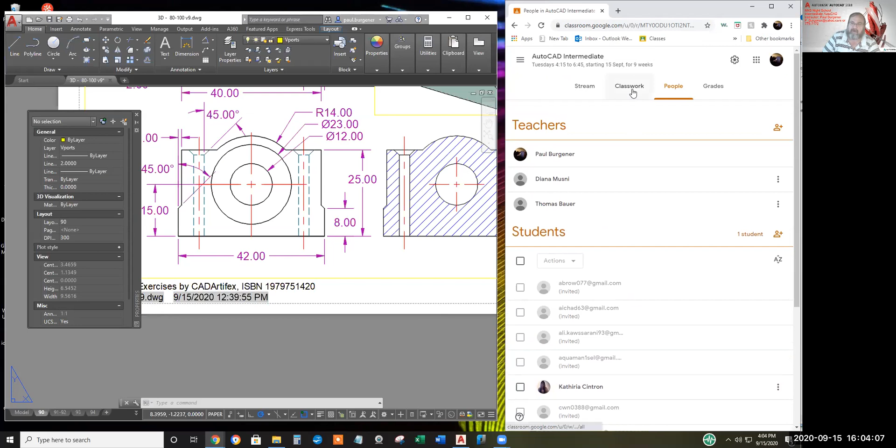I can't remember, you might be the one and only person that's moved into the classroom, so to speak. Yeah, I sent invites to about 13 different Gmail addresses I've got, and you're the only one that clicked a few times or whatever it took to join the classroom.

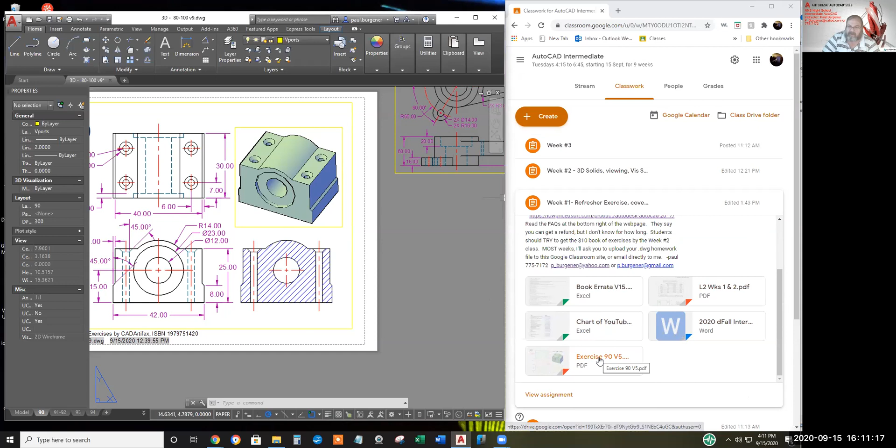While we're waiting, some of these files that I uploaded to week number 1 in Google Classroom, for some reason they won't open up in a browser. I got to figure out how to download them, but hopefully by now y'all have this errata sheet. There's been very, very little change since introductory, so it'll very rarely get updated. I'm trying to put a little asterisk every time I reference an exercise in handouts, as a reminder to go to the errata sheet to find a clarification or a typo correction.

Another file I should send y'all, this is, I sent you 2 weeks worth of the handouts. On the right side of my screen is our mission today, to see how much we've forgotten since introductory. I often refer to this assignment as a placement exam, like as if you need to pass this exam to start the class.

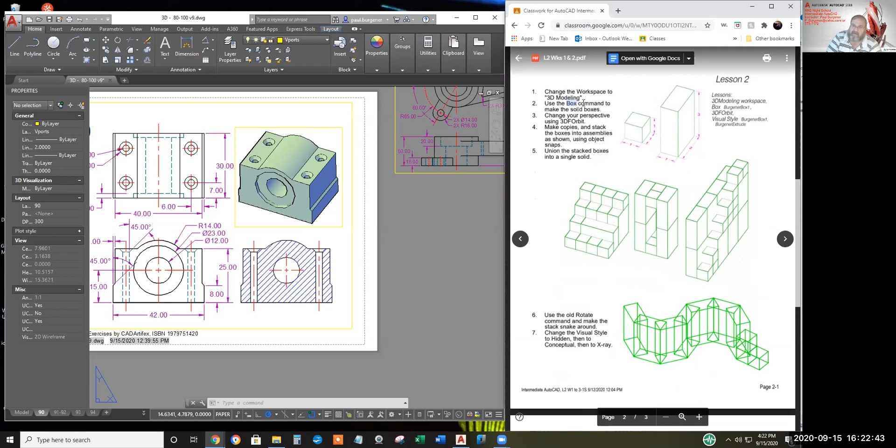Getting back to the handouts, again, next week we'll stack up these shoe boxes. We'll extrude rectangles or use the box command. The box is pretty limited. You just type box, enter, and type length, width, and height, and you end up with a solid box.

But pretty quick we get into the extrude command, where any closed polyline, or I believe a region, which I really don't teach at all, but generally speaking, a closed polyline you can extrude into a shape. And next week we'll get into triangles, pentagons, and hexagons, just because they're simple objects made with the polygon command. And stack them up. We'll also learn some visual styles.

Years ago, AutoCAD referred to visual styles as... nuts. I had it an hour ago and lost it now. We had a different name for visual style. I'm going to lose sleep on that now. So that might be a short week next week. Maybe we can get ahead between making boxes and stacking them, and making polygons and stacking them up, exercising a few of these visual styles.

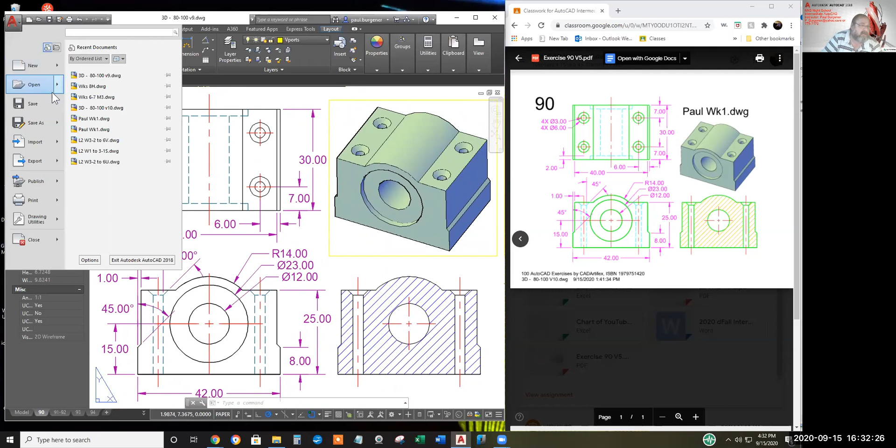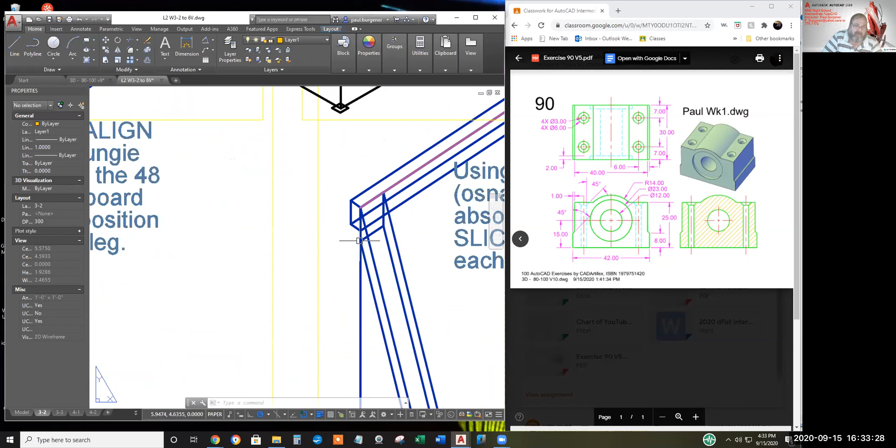Let me open up some more files of what we're getting into. Yeah, I think after next week of stacking blocks together, we'll get into, okay, that's week number 5. Let me revert to page 3. Not sure what page 3-1 was, but week number 3 we'll start working with these little lumber pieces. And an exercise I like to use is building a sawhorse. We'll learn how to use the slice command to slice a wedge off the leg of a sawhorse here, without having to know what angle to put on your miter saw. We can just use a 3-point slice command and lop off that plane right there. Eventually we'll generate this design of a sawhorse.

All right, I just heard a chime. Let me see if I can. Uh-oh. Hello, come on, come on. Damien is entering. Okay, they're letting Damien in.

Also in the third week, I give you a little, how to put this, a little busy work exercise of things to make using the same tools we made the sawhorse out of. And I think you'll find that my handouts for this intermediate class cover a lot more exercises than we really have time to do. So I give you an extra page here and there to continue practicing between classes, if you like. And I'm tempted to say everything on here can be done just with the extrude command, align and slice. Can't remember. Maybe this mailbox might be a little tricky.

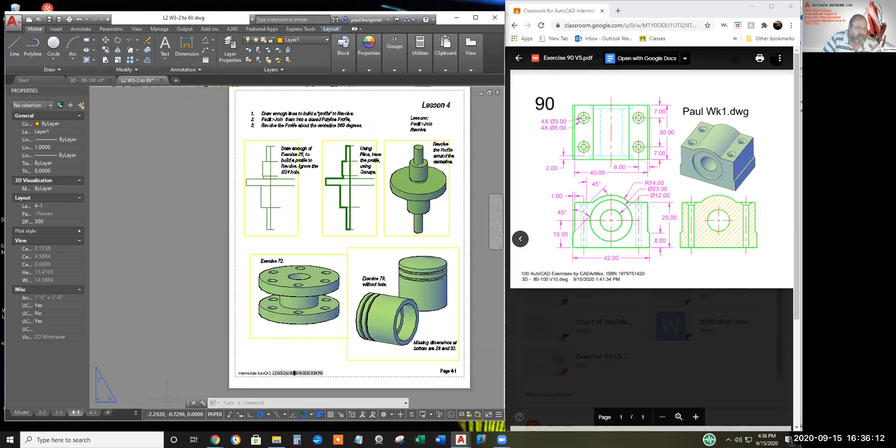This is a little busy work. We'll learn the revolve command to make this table leg. And eventually, leveraging what we learned in working the sawhorse, we'll use the intersect command to make these legs and make a little end table. Week 5, we get into some 2D topics.

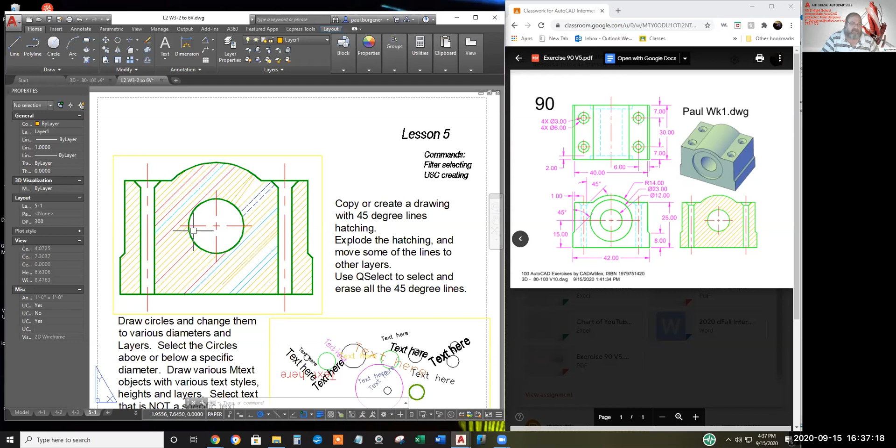Forgive me if I covered this the last day of introductory. But one intermediate topic, I think, even though it's not a 3D topic, is how do you select objects based on the layer they've got, the color they've got, in this case the angle of the diagonal. Your mission is to delete all these 45-degree lines. And you see there's very, very few that are not at 45.

Anyway, with filtering, we can, I'm getting deja vu. I did cover this in the end of introductory, but with AutoCAD's filtering, you can say, hey, AutoCAD, select all lines that are at an angle of 45 degrees. And similarly, you can say, hey, AutoCAD, select all pieces of text whose rotation is not 0. And you can straighten them all out

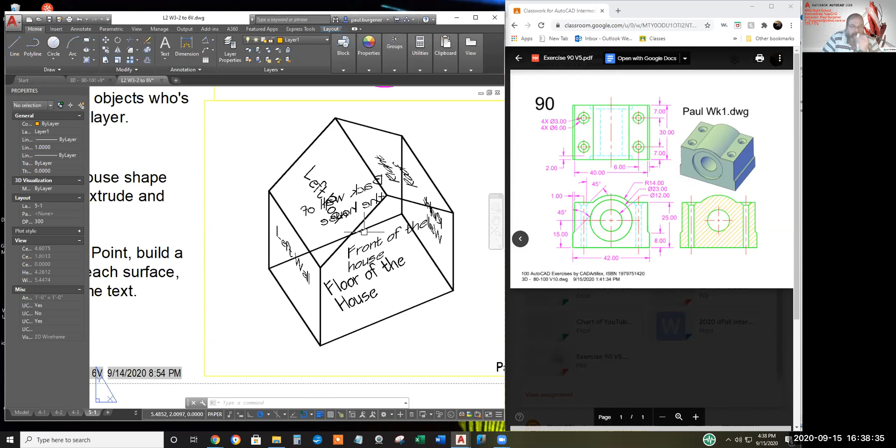with this database query. We'll also get into putting an XYZ coordinate on different sides of this little house shape object. You can only go so far with X and Y being on the floor of your solid model and Z being straight up. Sooner or later, you need to put X and Y on the side and bottom edge of a sloped surface. And so we'll play with XYZ changes.

Finally, in week 5, we get to viewports and layouts. I used to teach this the last day of introductory, but we shortened how many weeks we can teach now, so I bumped it into the intermediate. Kind of surprised I bumped it all the way to week 5.

Let me toggle over here to the model tab. Each of the viewports can show a different view of your 3D solid object. So you can have one camera looking at a southeast isometric here and one looking in front view. You know, it's kind of like having different cameras set up.

Let me admit somebody with an iPhone who is joining us.

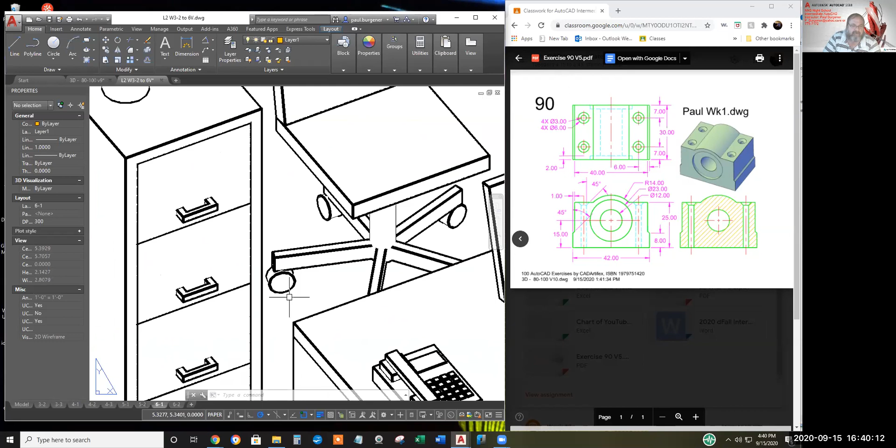Let's see, in week 6, we'll get into making blocks. I can't remember if we got into blocks with 2-dimensional work. But there's very little change in making a rubber stamp out of a 3D object. So you can weld all the parts of this office chair together, so it's one welded assembly.

That is cool. He is good. Like that, huh?

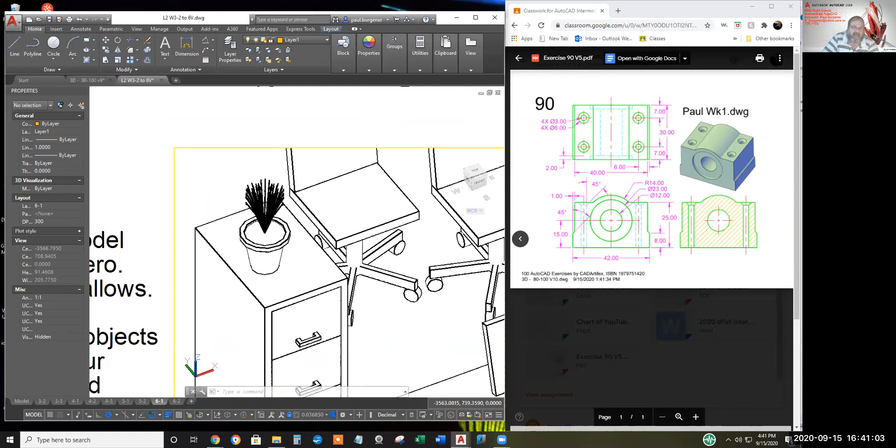That's cool. Okay. Eventually, I'm hoping I can assign one student to make an office chair, another to make an office file cabinet, another to make an office plant, and just for the sake of time, make it extremely crude to begin with. Then we'll share each other's blocks with the entire class, and as time permits, you can add arms and wheels and more complexity to the block that you own.

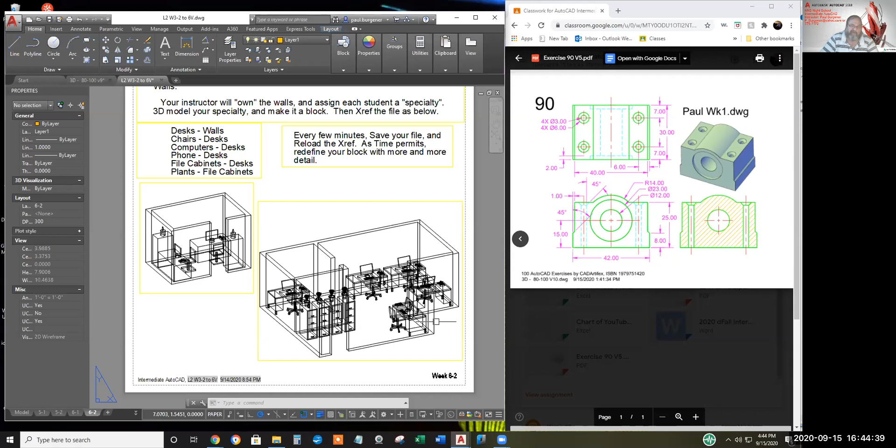And it gets into some high-tech intelligent drawings with attributes assigned to many of the objects. And I believe architects will be able to generate a bill of materials. The computer can count how many repetitions of the desks are in the drawing and generate a table saying, hey, you've got to order 10 of these Acme model seats and 30 of these for the conference room and 20 of these for the break room. Same with the windows and doors and all the material that goes into your architectural drawing.

Let me open up the final project. And let me go up here to the final project, which I think will take you a good 2 weeks to work on. It will be a birdhouse.

Why am I having trouble? Someplace I got a file of birdhouses that students have made in the past. And why am I not finding it? Well, let me go back to the 2019 intermediate class, and that might be where the birdhouses are. Okay, this is my bird. This is an old handout I had. Why did it not open up? There we go.

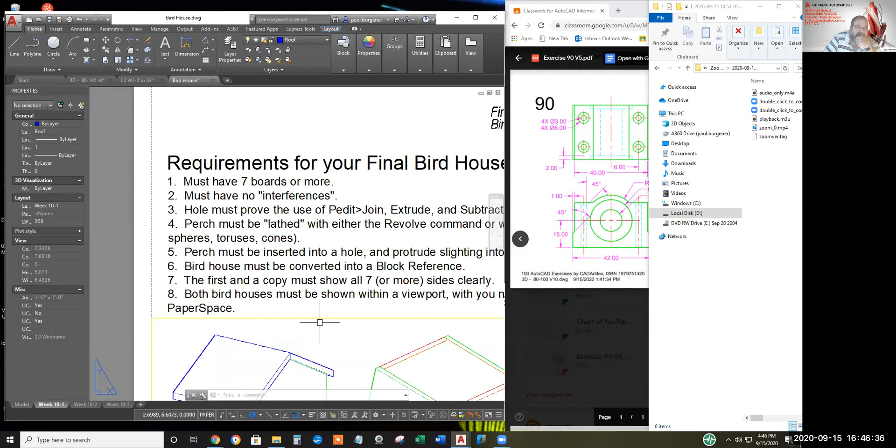I'll give you a list. I forget how old this file is, but I'll give you a list of 8 or 10 or 12 different requirements for your contract. And one of them is I want you to build some odd shape, a clover leaf or a snowman or this little Twitter bird or something, and use it to subtract away from the front board of the birdhouse, showing that you can remember how to join all these lines and arcs into a polyline and extrude them into a shape, and then overlay the extruded shape on this board and then subtract from the board the extruded shape, leaving the void in.

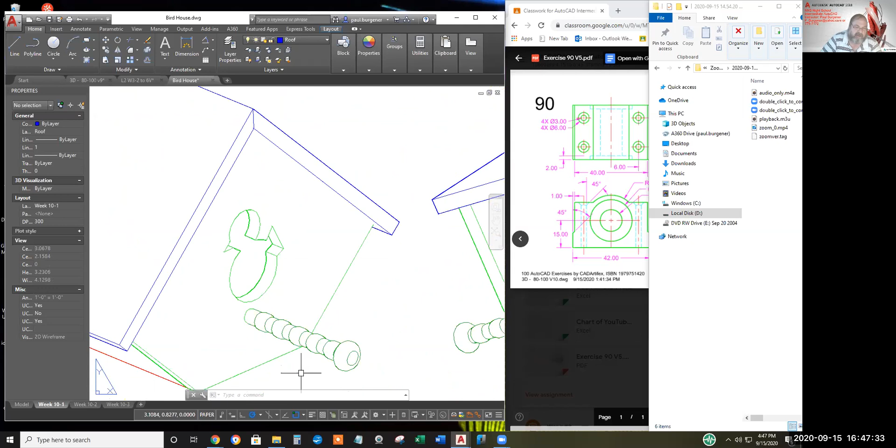We'll also learn the revolve command on how to spin like a baseball bat or something on a wooden lathe. I want you to make a perch using the revolve command with possibility of an exception or using primitives for it. You can stack a bunch of spheres up. It's probably about the same amount of work. Let's see.

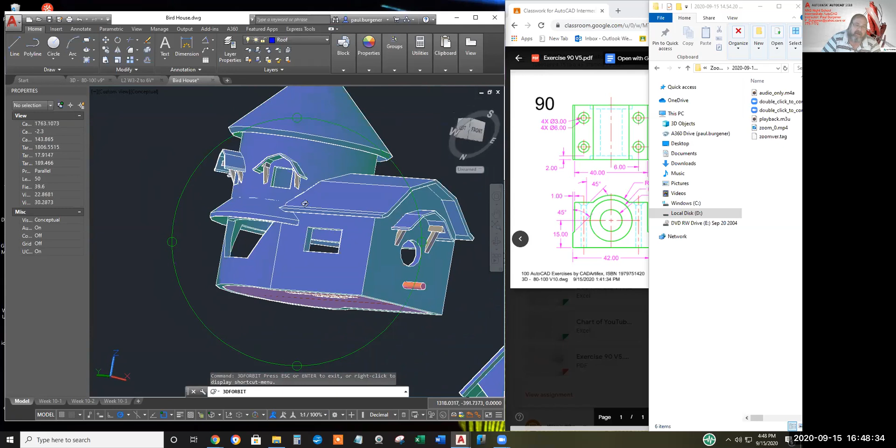Yeah, many years ago, a couple students kind of got carried away and did these birdhouses. And I think on the backs of them, I should still have the student name. 3DFO, enter. View locked viewport, here we go. 3DFO, enter. Yep, there's the student name. Back in 2012, James McLaughlin made this one. And I have no idea how many hours it took him to model this birdhouse. Again, this is above and beyond the call of duty. I think you can do everything that James McLaughlin did with what we cover in class.

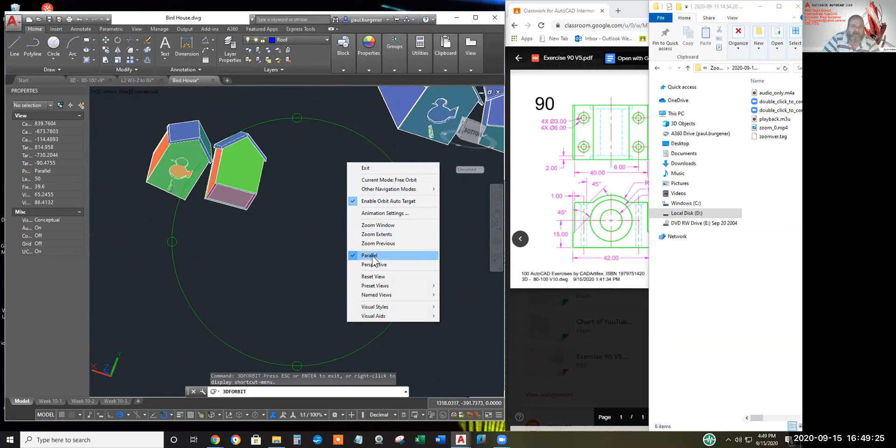Here's a bunch of birdhouses, most of them I made. Some of them are just made just for the challenge of them. Yeah, I'm kind of proud of this pentagon-shaped one here. You look straight down on this birdhouse, it's a pentagon, but the roof is sloped. So it would be quite a woodworking challenge to set your table saw to make this pentagon birdhouse.

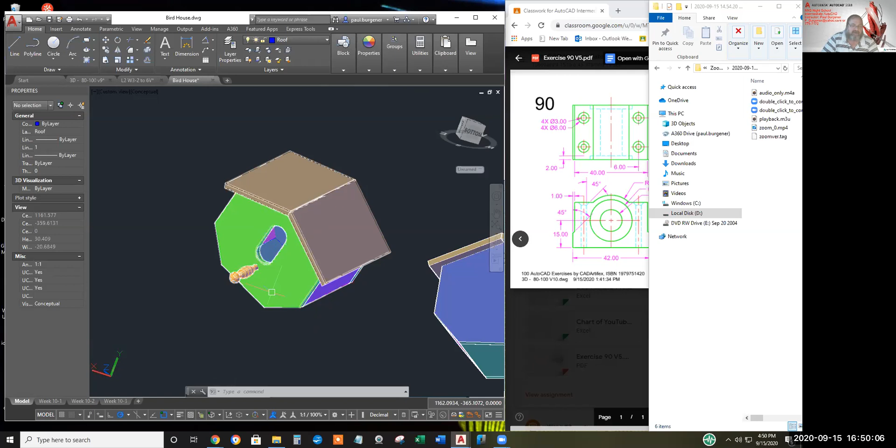Also, I don't believe these have the attributes on them, but I'd like you to attach 2 or 3 attributes, saying the model number, the date of manufacture, I forget what else. It'll be on the list of the requirements. So you weld everything into a block and assign it these 2 or 3 or 4 different attributes. So that if you copy them 100 times, Microsoft Excel can generate a spreadsheet of how many Model 7 birdhouses there are, and how many Model 7s have been doubled in scale, and how many are on the 3rd deck of the ship, and all sorts of stuff.

Anyway, again, today's mission is just to remind ourselves how smart we are, or how much we've retained from introductory. I got about 10 minutes to 5. Want to take a break this early, and eventually I'll walk you through this exercise and jog your memory if you've forgotten anything. Take a break until 5 o'clock. Hearing no objection, I got 4:51 on the computer. Let's reconvene at 5 o'clock then, and I'll go through the

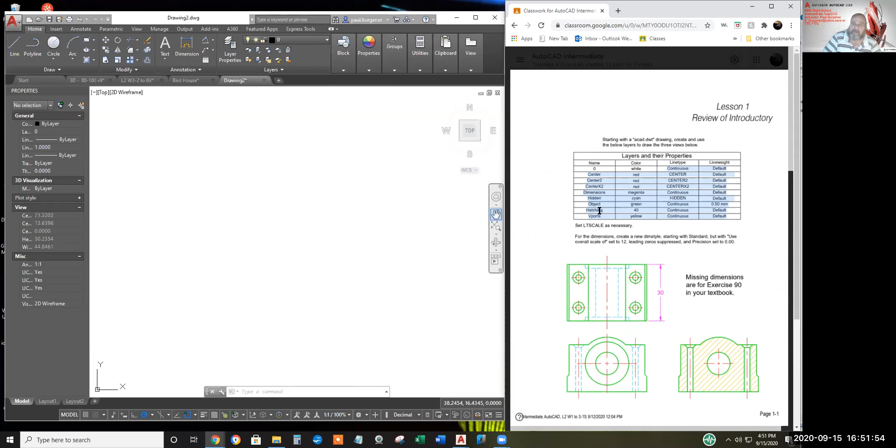Step 1 of today's assignment is to make the list of layers. Some of you may have forgotten. I'll have to admit these are not in alphabetical order. I saw that a little late. And I'll walk you through toggling from one layer to the next to draw the green, the blue, the red, and remember the mirror command.

Once you made one, wish I could zoom in on this. I don't know why it won't let me. Anyway, once you make one double circle with red sniper scopes, just simply mirror it to the next one, and then mirror the 2 into the other side. And once you make the hidden view of the holes with the countersink, don't redraw it over here, mirror it over there. Okay, see you in 10 minutes then.

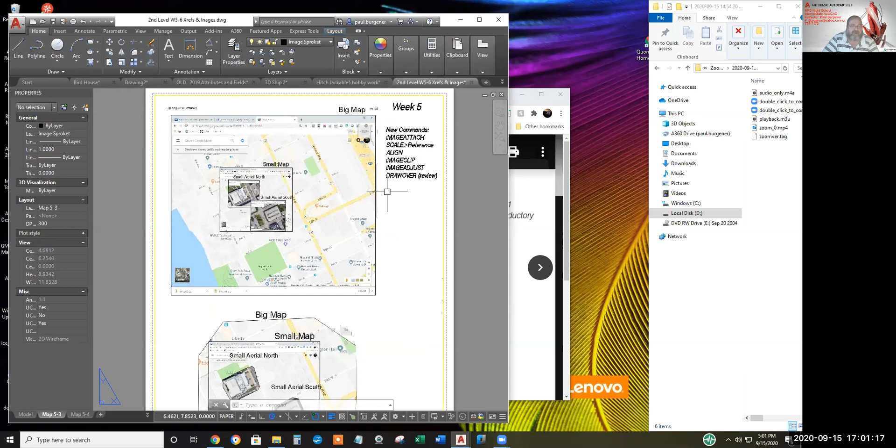If time permits, I'd like to get into these images out of maps.google or MapQuest. You know, one of the mapping websites, you can screen capture a map, and hopefully you got a bar scale in the corner down here. This one says 200 feet. So with the scale command, you can scale this so that this line is exactly 200 feet long.

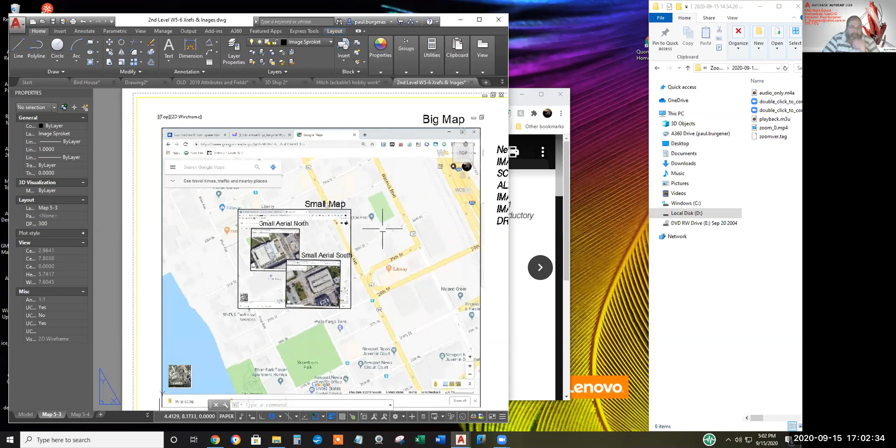And with other screen captures of closer and closer areas, you can align them. I think this is the parking lot that we used to park at when we had classes at the apprentice school. So I aligned this aerial image on the background so that the roads are contiguous. And with this technology, you can plot your 2-mile jogging path, or trace the area that you want to build the new parking lot. And AutoCAD will tell you how many square feet that area is.

And there's also some, I don't have a file open, but with a scanned gasket or a bell crank or piece of sheet metal, you know, it's kind of imaginary if you're out in the oil field and one of the rigs breaks down, take a photograph of the broken part, bring in the photograph into AutoCAD, you can scale it and reverse engineer it and develop a blueprint for the machinist to manufacture a new part with this AutoCAD imagery stuff.

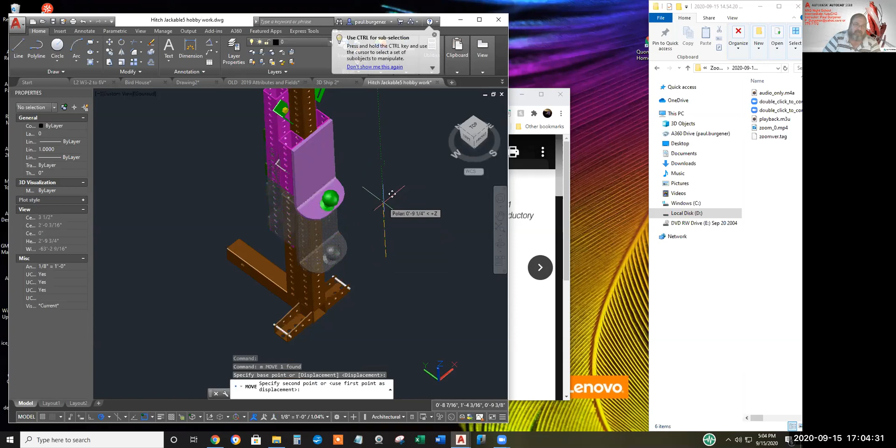But with this trailer hitch and an old bumper jack from a 70s car, you can raise this little elevator up and down the trailer hitch to adjust the ball to a wide range of heights. Not only can you keep your trailer level by adjusting this hitch ball up and down the elevator, but you can tilt your trailer to almost make it a dump truck, possibly even tilt a car carrying trailer so you can winch the car straight up the ramp and onto the trailer. One of these days I'll find all the pieces and get back to building this, see if it really holds together.

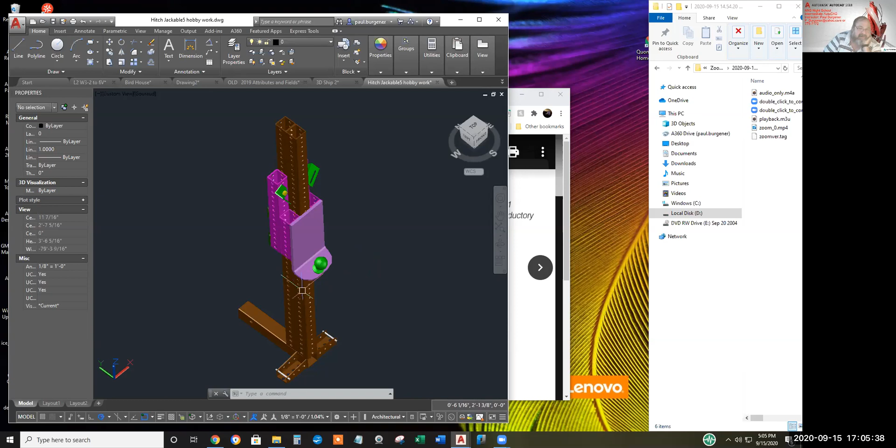Excuse me, Paul. Yes, Dan. I've bent 3/8 plate with a log splitter. Oh, yeah. Take a piece of wood, like a 4x6, put a V-notch in it, and then bring your knife edge of the log splitter up to it and bend it. I'm with you. A neighbor of mine's got a log splitter. Another similar option, I could borrow the, what do you call, a bearing press from one of the shops on base and do that. Yes. Well, that's a good idea. Years ago, I'd put a bunch of weld beads across and just wail on it forever with a hammer, but getting a little old for that.

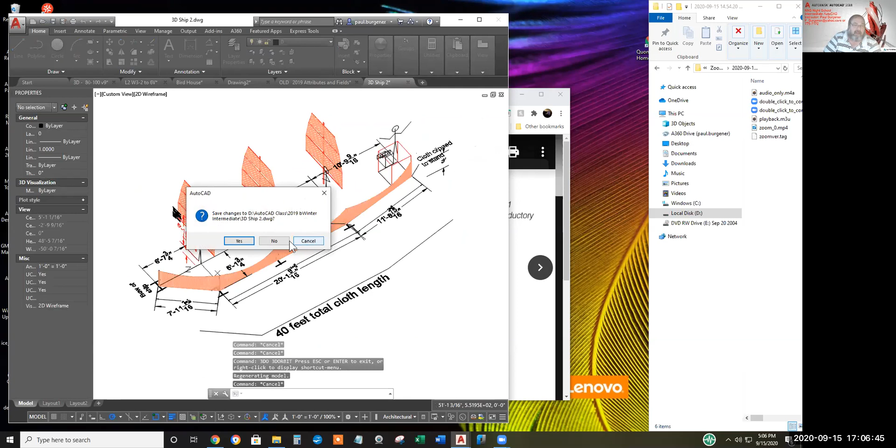Getting back to what we'll cover in the next 9 weeks. I haven't finalized the handouts for this quarter yet, but I want to teach you about text fields.

Within a piece of text, you can have a word be an intelligent object. In this case, watch it make a liar out of me. The rectangle around this intelligent field I just did to simulate what you'll see on your computer.

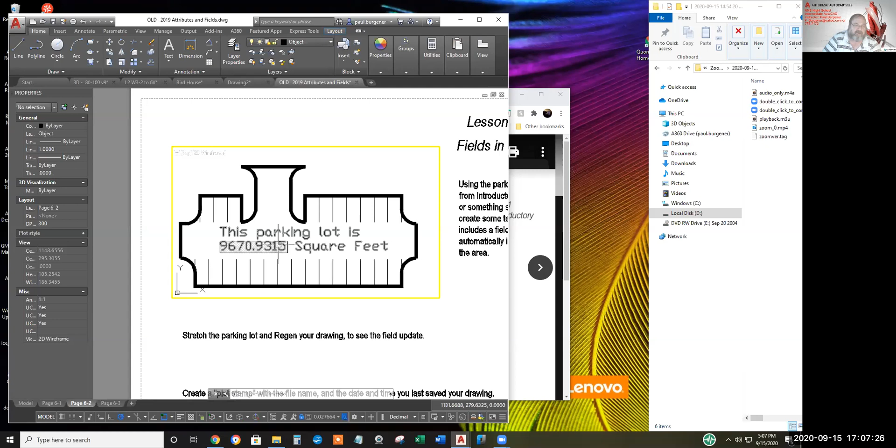If I were to stretch this polyline, keep an eye on this number, 9670 here. I'm going to stretch the parking lot out, and watch it make a liar out of me. Regen... 9670 should, there we go, it shot up to 11,490.

So this is another way of giving intelligence to your CAD drawings. Using fields in your text, you could have it print out. I often use this as a plot stamp in drawings - it'll plot out the date and time that the drawing was last saved.

I've seen architecture drawings come in that have the name of the CAD operator, the user ID of the CAD operator, in the plot stamp of who last worked on it.

You can also have an attribute. You just add it right here in the paragraph, and another attribute might tell you the length of the curbing all the way around the parking lot. From the square footage of the asphalt and the perimeter of the curbing, it's pretty easy to estimate the cost of this parking lot.

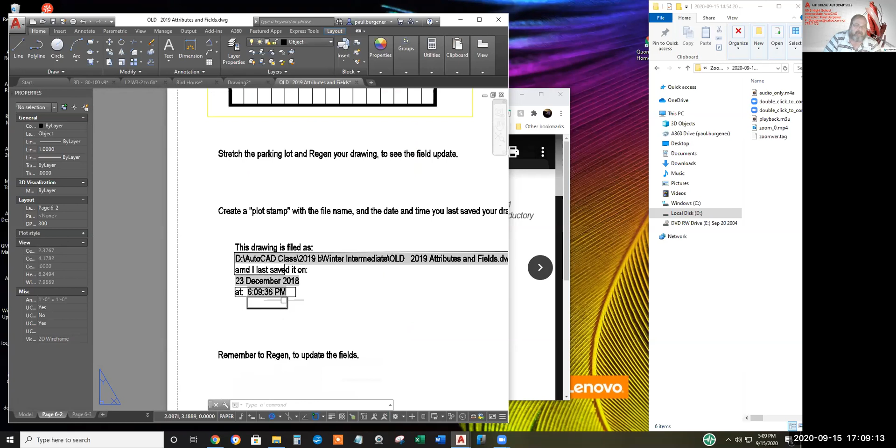Yeah, again, this is a plot stamp. My phony highlighting kind of got out of sync. But, what else? These are very old.

Now the array command, you can replicate a symbol all the way down the length of a polyline. But we used to use the divide command or the measure command to replicate and place a point or a symbol every so many, every quarter of a polyline, or every 30 feet of the polyline.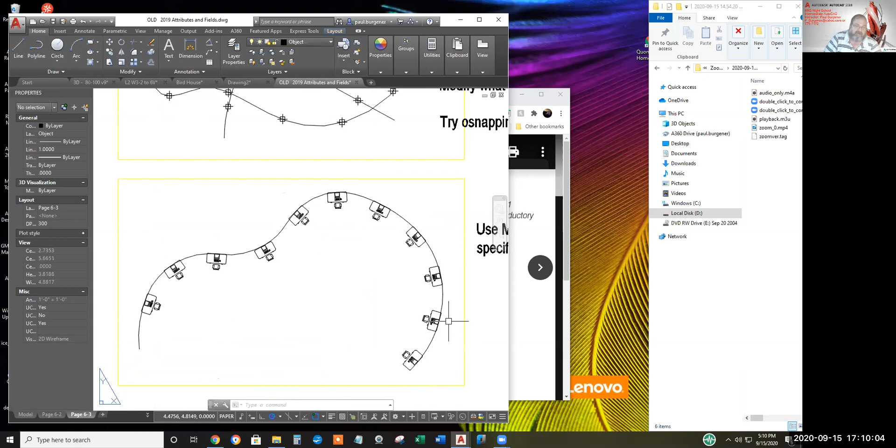This is kind of a bad example, but here I wrap these desks around, imagine if you were arranging lawn chairs around the swimming pool of the new Hilton Hotel.

There's also a way that you can effectively simulate a ballpoint pen with AutoCAD. I don't think it's very commonly used, but you can make some settings, let me show you. Sketch.

Somebody come in. I don't see any buttons to click on. Where was I? Sketch. Increment - I want the length of each segment to be this long. I think it's ready to start working.

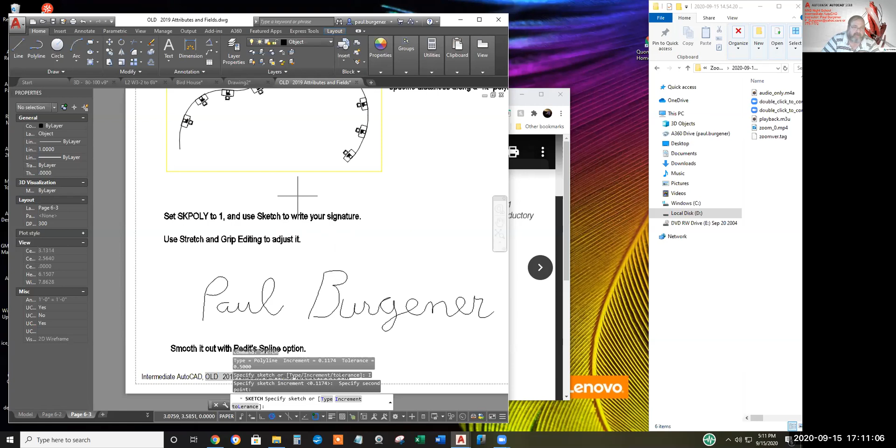Now you can really fatten up a file fast with this. And here I just drew a polyline by spinning my cursor around. It's probably higher tech now, but it used to be a way you could kind of put a signature on a drawing by using this sketch command.

Not a very secure, high-tech signature. That was a topic we used to have in intermediate.

What else have I got here? Okay, more birdhouses. Anyway, 5:15, got an hour and a half yet.

How far has anybody gotten underway with exercise number 90 for today's assignment? I have, I've gotten pretty far. I think I need a few more things though.

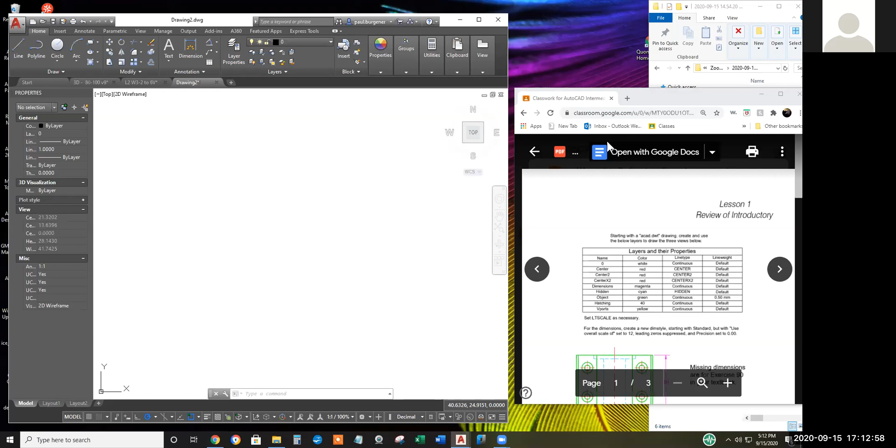Excellent, that's Ahmed. Damien, yes, oh good, glad to hear that. I remember we've conversed - appreciate you helping me test the Zoom stuff the other day. Glad you're getting motivated. I just noticed...

I was about to say this is an old drawing I got down here, but that's a new date on the field at the bottom. For a long time, I had handouts that had this counterbore area much larger than it should have been. I was afraid I might have missed a file, carelessly. Anyway, all right, well, let's get going then.

Taking page 1-1 of today's handouts, let's start with a brand new, start-from-scratch drawing, acad.dwt, and create and make use of a set of layers.

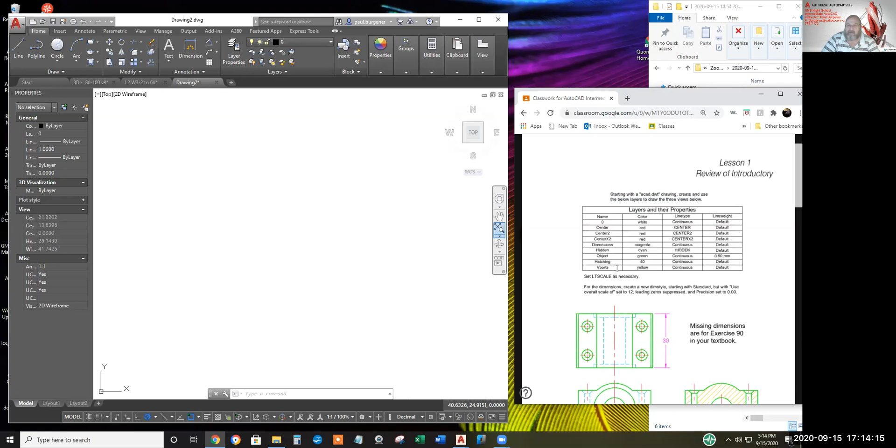Now, a lot of people, myself included, kind of hit the ground running and just put everything on layer 0, then later realize, hey, I need stuff in different colors and different layers. It's probably better CAD habit to make your layers first and toggle from current layer to current layer, but I don't know how many people have that good of a habit.

Let's click on layer properties. I think this was middle of introductory class, week 3 or 4. Every time you click on this icon with the starburst on it, you generate a new layer. You can rename them the instant you create them, or go back later and rename them.

So here I've gone back to rename layer number 2 - we'll name that one, say, center. No need to create the 0 layer - you can't rename it, and you can't get rid of it, so you're given that one for free.

Handout says the center layer should be red and center line type. So let's go over here after naming layer 2 center, we'll come over and click on the color swatch, assign the layer name center the color red.

Line type is continuous on all brand new layers. You would think you could click on the word 'continuous' and a menu pops up showing different line types — center line, phantom, fence, gas, hidden, dot, dash. Unfortunately, a start-from-scratch drawing only has continuous, because AutoCAD fresh out of the box is stripped down, no frills, lightweight, minimum file size.

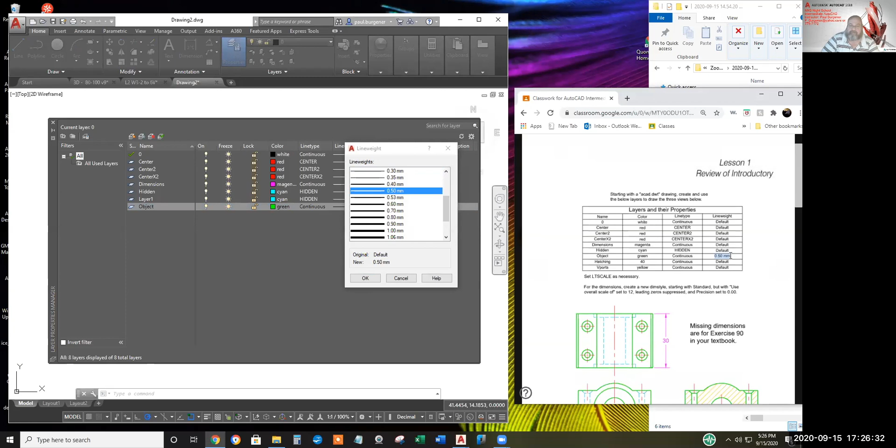Anyway, I'm going to change the line weight of everything on the object layer from default to 0.5 millimeter. Default, fresh out of the box AutoCAD, is 0.25 millimeter. You can change default to be whatever you want, but fresh out of the box, I remember it's 0.25 millimeters. So object will be twice as fat as lines drawn on any other layer.

We'll select this default named layer, right click, pick rename, and rename it hatching. Assign it color number, what was it, 40? Rather than hunting and pecking around till you find color number 40, just go ahead and type in color number 40.

These basic colors here, you can also type in the word red, yellow, green, magenta, or the number, 1, 2, 3. Color number 7 is the only color that changes depending on whether your background is white or black; it will be white or black to contrast with the background. Again, we want the hatching to be this shade of orange, color number 40. Click OK.

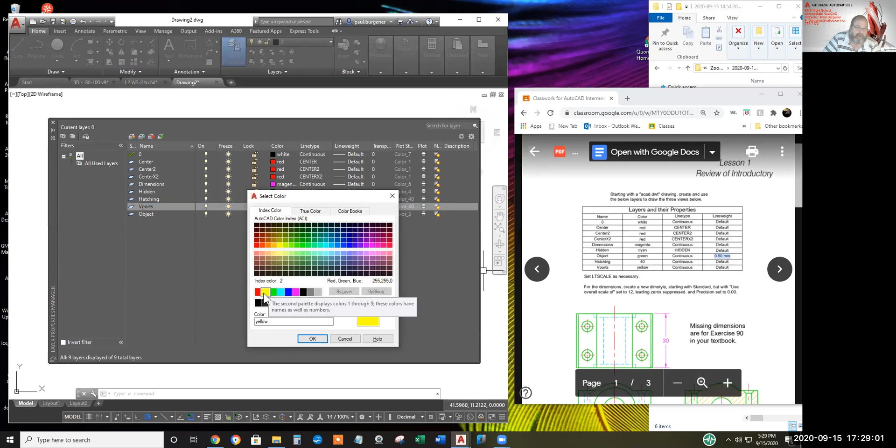I suggest using color yellow. I've seen professionals use a faint shade of gray, but you want a color that is not very attention grabbing. Yellow is about as close to white as you can get. So I recommend yellow. I'll click OK.

Now check it out. Viewports, in my opinion, should not be used as borders in your drawing. Most viewports are rectangular; I showed you viewports earlier. You can have a viewport showing different top, bottom, right, left, zoom in, zoom out. Each viewport could have a different telephoto lens camera rigged to it. And in rare cases I've seen a viewport used as a border, but I think that's bad practice.

We don't want them to print out at all. So let's take advantage of this AutoCAD feature that we can control what layers plot out and what do not plot out. You'll see it on your screen perfectly, but it'll never appear on a plot out, even a PDF plot out.

By the way, first time you dimension anything, you'll automatically get a layer called Defpoints. It never plots out. That's very, very old technology, but Defpoints still remains just for the sake of programmers that wrote programs taking advantage of the Defpoints layer. I think some people may still draw on Defpoints, but there's really no need to, because any layer could be rigged to never plot.

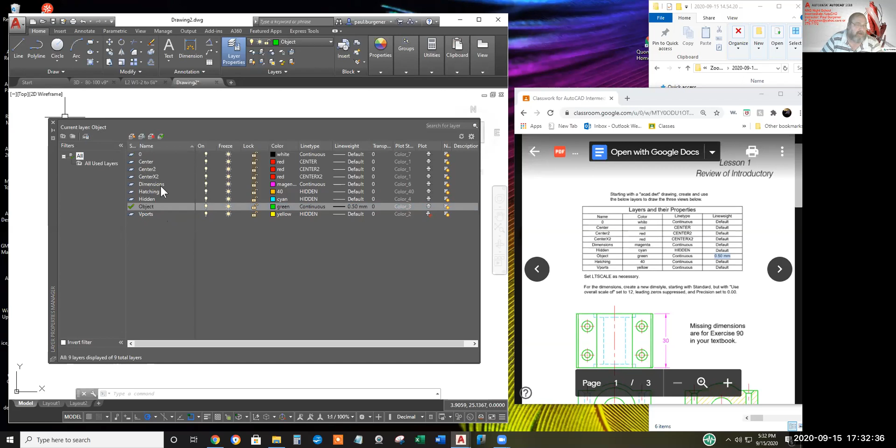That reassigned the current layer to be the object layer, and up here in the upper left corner it shows, once I close the layer properties manager dialog box, I'll be drawing on the object layer with text, lines, arcs, circles, solids, whatever I'm drawing. Double checking. Don't think I've overlooked or forgot anything. Let's close.

Let's come back to creating the dimension style. And let's come back to setting the LT scale. That's kind of a steroid for how big the lines and gaps are on line types that have lines and gaps. The higher the LT scale is for your drawing, the longer the gaps are, and the longer the lines are. So this way, you can put a whole aircraft carrier on a letter size sheet of paper, and by setting the LT scale super high, the gaps can be, I don't know, 10 feet long maybe for the center line of an aircraft carrier. Carriers are 1,000 foot, 10 feet. Yeah, that might be accurate.

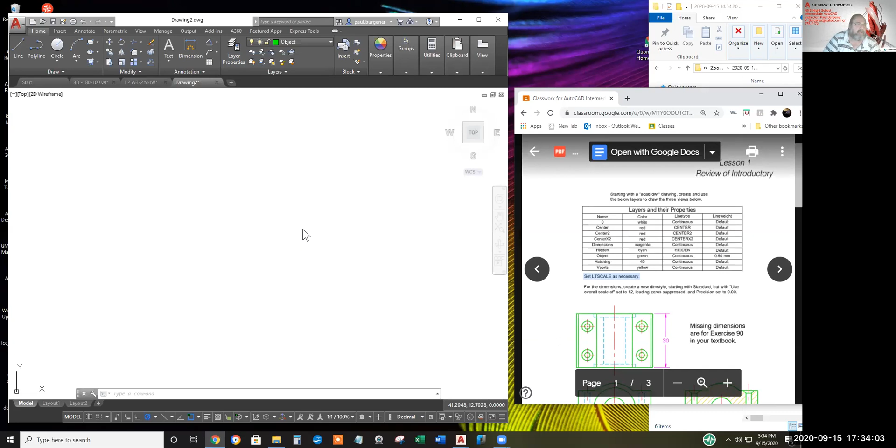Anyway, let's start drawing object lines. My habit is typically drawing the front view first. You know, to each his own. But let's start with the center of the front view, draw some circles and draw this arc, and then draw the right side. And once we got something on the right side, let's mirror it across to the left side. Now, I tend to rattle the keyboard with all the aliases I learned, but for the sake of students, I'll try to stick with the icons. With the exception of this 30, we'll need to go to the textbook.

Here I've given you the page of the textbook, exercise 90 drawing that I emailed. Again, I made a few improvements since I emailed it, but they're minor. The two small circles are dimensioned by diameter. That's the circle phi. That's global machine shop language. When you see a circle slash, that means diameter. R, of course, means radius, or half the diameter.

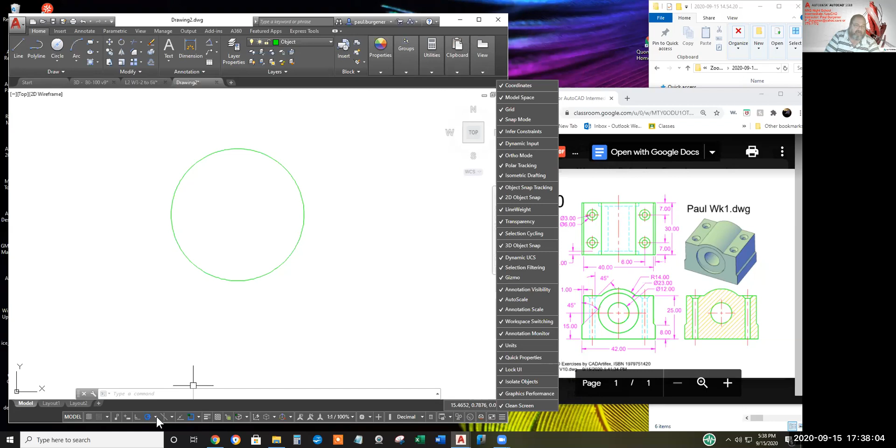So have all of them visible so that they all display, so that you can see that all of them are turned off, except for polar tracking set to 45 and object snap tracking set to Burgener's 5 favorite.

Getting back to drawing circles, let's click the Circle Center Diameter icon again. It's on the ribbon now because it's the last one we used on the flyout. You just home in, rest, slide your cursor over the circumference, and that'll highlight the center of the circle for you. Click, come out and type 23, enter for the diameter of the next larger circle.

Now there's an arc across the top here that's radius of 14. Why can I not highlight that with my cursor? Always something. That's okay. We'll drop down and select circle center radius to draw that arc at the top. We'll begin with a full circle. Eventually we'll trim it down to just the arc we want to print out.

So click on center radius, hover to home in again on the center, and type the radius for that arc, which is 14, enter. Now 15 units below the center of the circle is where we want the bottom of this metal object to be.

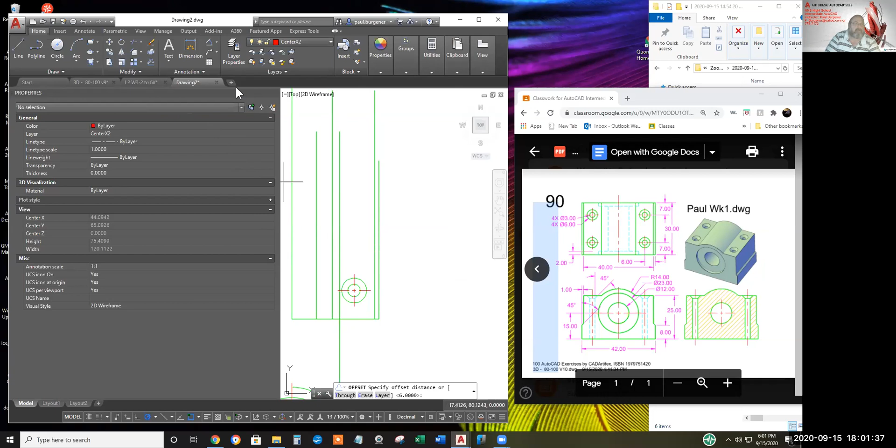We want a line across the top here that's 30 units from here. A couple ways of doing that. Did the offset method before. Let's do it again. Launch the offset command. You can turn off properties now, though some people might leave it permanently on. What happened? There we go. Let's see, where was it? Offset, 30. We want the offset distance to be 30.

Select the line we want to offset, then select which direction we want the offset to go. Again, copy is just as easy here. Looks like I misjudged, not quite long enough, not a problem. We'll use the fillet command. I believe the radius is set for 0, but let's double check. Yep. Hit enter to accept it and leave it at 0. Click, click, and there they go to a 0 radius at the corner.

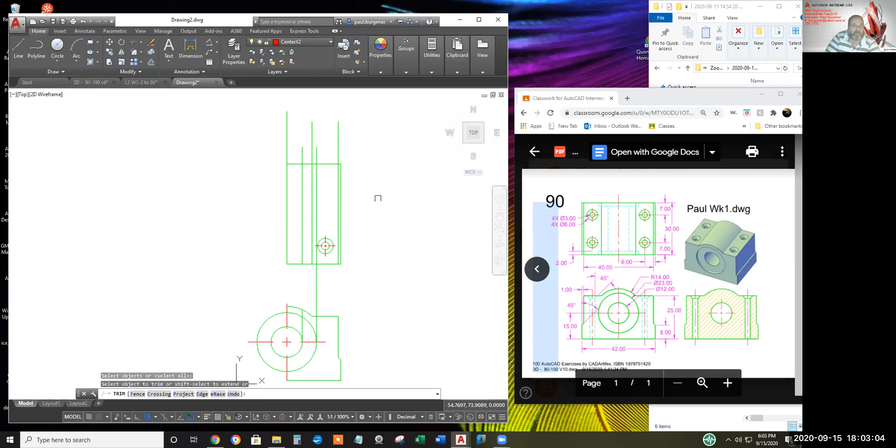I believe I can trim off everything up here. And I guess I could trim this off too. Anyway. Trim, enter. Being incredibly lazy, I'm not going to go click, click, click, click. I'm going to go F, enter, and draw a fence line across. Click this guy. That's all the trimming I want to do.

To get that little cyan line here, I'll offset this green guy 2 units. Offset, enter, click, boom. Why did it not do anything? Huh. Well, forgive me, I'll try it again. Offset distance, how did it get to be 39? Oh, looks like I mistyped 30, didn't I? Always something, ain't it? All right, we'll erase that top guy and do it correctly. Offset 30, not 39, enter. Click, click. Now we can trim, enter, F for fence.

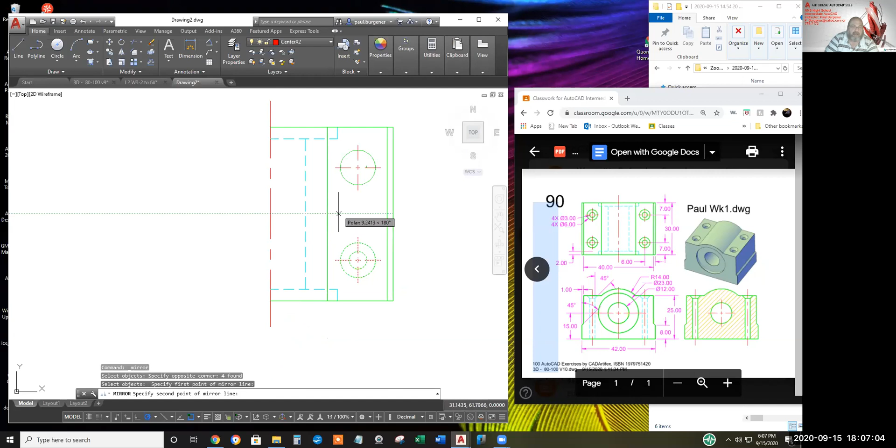Let's mirror this circle and center line assembly, enter, about the center line. I'm tempted to say the top view's done once we mirror it over. We can mirror the top and the front view over one step later. Let's draw some more construction lines straight down. From this intersection to the intersection right there is a 45-degree line.

Let's move these to the hidden layer. I think it'll get the intersection O-snap a little bit more cooperative. O-snap there to there. And trim, enter. And erase. And move to hidden or match properties. You need another guideline straight down the center. We'll mirror up. Let's draw another hidden line. I forget, this might be missing from your book. I can't remember. Anyway, we'll change that to the hidden layer.

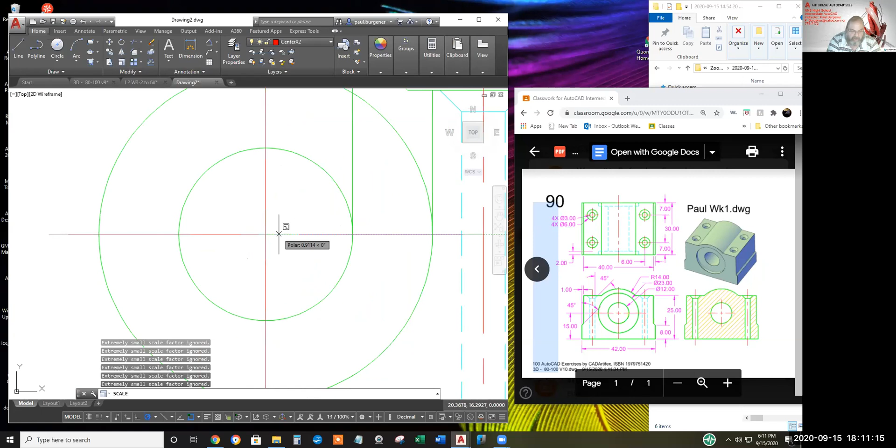Now I believe we can go LT scale higher. It made a liar out of me again. Where was it? 6 or 7? F2 will bring up the... I guess I set it back to 7 again. Let's see, we can erase a few of these lines.

I believe we're all set to mirror virtually everything except this circle across this vertical center line. And that circle. Let's go to mirror. Here we go. Check this out. I'll select everything with a regular window. And just the one vertical center line in the front view far left.

And I want to deselect. All right. Click, hold the shift button and deselect that vertical line. Hit enter. We got 33 objects selected. Depending on how you did yours, you may have the same or maybe a little fewer. Enter, O snap on any of these center lines, polar up or down. Answer the final question. No, I do not want to delete the original. There we go.

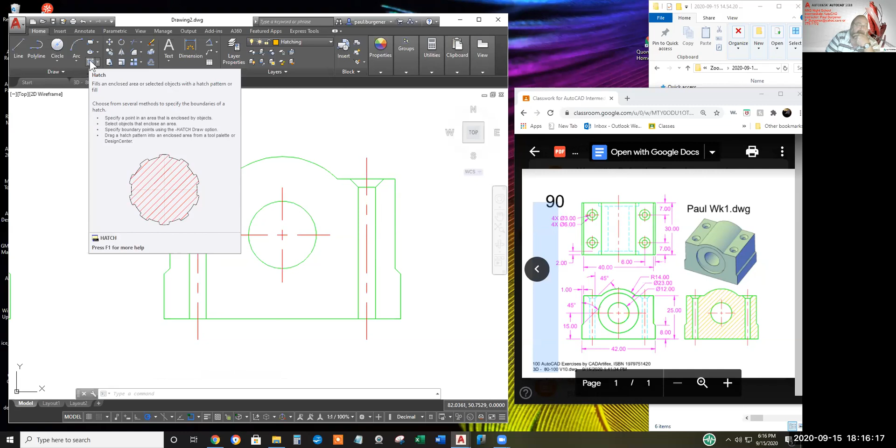I'm going to scale the center lines much shorter. How much shorter? 0.6 maybe? Scale them down maybe another 0.9, enter. Move them to a finer layer. Now I need to crosshatch 1, 2, 3 areas, but these, nope, red lines will not interfere. So let's set current the cross-hatching layer, start the cross-hatching procedure. Over here on the draw panel of the home tab. Click the 3 areas.

ANSI 31 happens to be the pattern. Not sure why, if that's default or last used or what. Interesting, the scale is grayed out. Why is that? Well, let's just hit enter. All right, why are you not? And hit escape. I'm going to double click on this cross hatching and change the scale, I think, to say 10, enter.

Now on the paper, you want to have these lines 1/8 of an inch apart. All the textbooks will say that. But we don't know how big it's going to be on a sheet of paper yet. So we're just about as far along as we can. I think it'll be a slight increase. Where are we now? 10? Yeah, 10. I'm guessing in the handout I did 11 or 12 by counting the crosshatch lines across the green line here. Worry about that later.

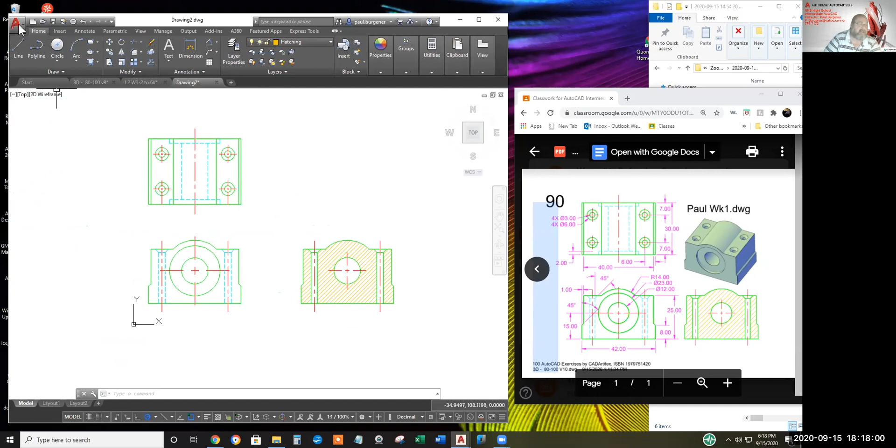Getting back to dimensioning, by the way, it's probably a good idea to save your drawing several times by now. I will drop down to the D drive. AutoCAD class 2020 fall student work, week number 1. I don't have a folder yet for all the students. Here's where I practiced earlier. I'll call this one Paul WK1A, just to give it a new name.

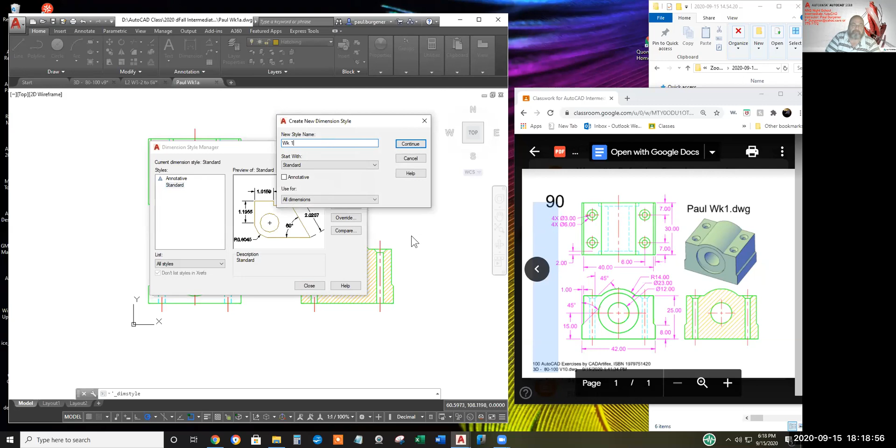Getting back to dimensioning, we need to create a new dimension style. Starting with standard, we're going to create a new one. Let's name it, say, WK1. How do I get back to my handout? There it is. For the dimensions, create a new style starting with standard, but change the use overall scale of setting to 12. Suppress leading zeros and precision set to 0.00 for linear only. That's another change I made. Click continue. On the fit tab is where we get to the use overall scale of 12.

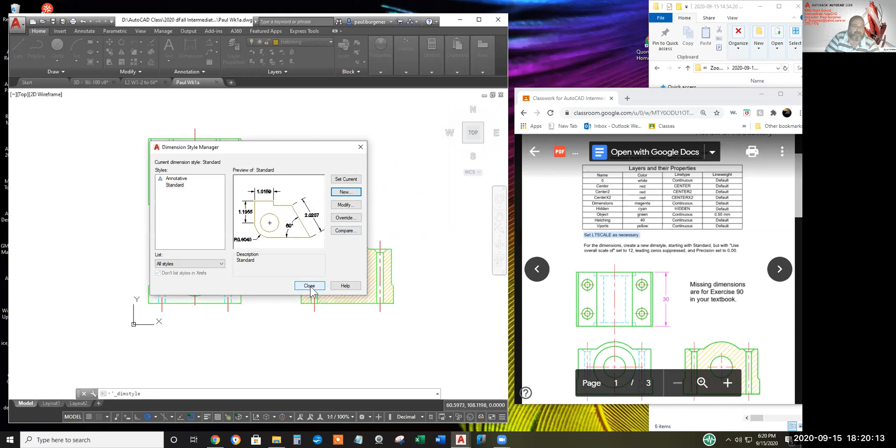Still haven't gotten these memorized perfectly. I believe primary units has got the leading 0 suppression and the precision set to 0.00 instead of 4 places. Now, one of my earlier handouts had the precision for angles set to 0.00, but I've changed my mind on that. Just default, integers is plenty good. Set current after we've set the dim style.

Oh, my bad. I've just modified the standard style. Bad, bad, bad. Can I undo it? It's a little tedious to restore the standard dimension style after carelessly altering it. Okay, it looks like I successfully undid it.

I'm going to click New. Well, I thought I did that. Didn't I give it a new name? I'm talking, thinking, and drawing at the same time. Change the use overall scale to 12. Set leading to suppress, 0.00. Leave angle set to 0 precision. Click OK. With our new style selected, click Set Current. Click Close. Set the layer current, the dimensions.

And then we'll start with, just to match the handout there, toggle over to the completed exercise 90 handout. What happened? Going across the top here, this is about where I say you get the idea. I guess we could have made some settings so we didn't have to massage, tweak a few of these dimensions.

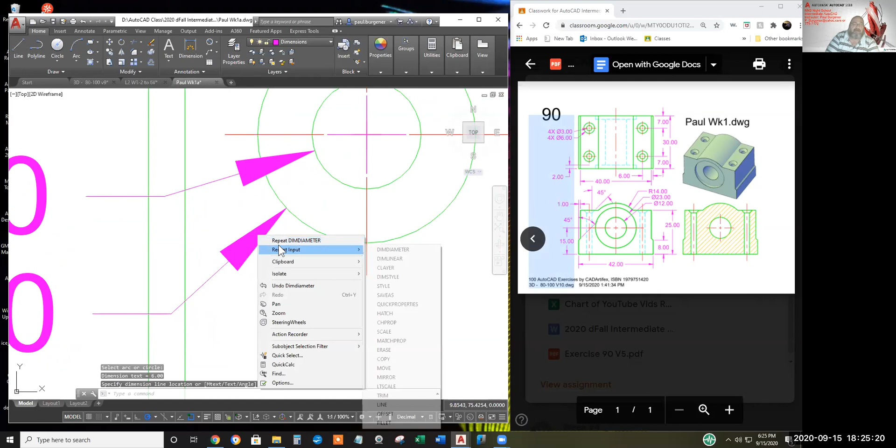Now, how do I put the 4X? Well, double click on the text of the dimension. I know that, you can't see it, but I know the cursor is flashing at the far left of this text. So what I type is going to be placed to the left of this associative magic text. If you don't trust me that the cursor is flashing over here to the left, just hit the Home key on your keyboard, and then you can rest assured that the cursor popped over to the home of that line of text. And you want to add 4, Shift capital X, space, click outside.

There you go. If I were to scale this drawing by a factor of 3, the associative text would reflect the scaling. This would go from diameter 3 to diameter 9, but the 4X would ride forever. I'd have to change the text style to increase the height too. Anyway, escape, my voice is about giving out. 4, capital X, space, click outside.

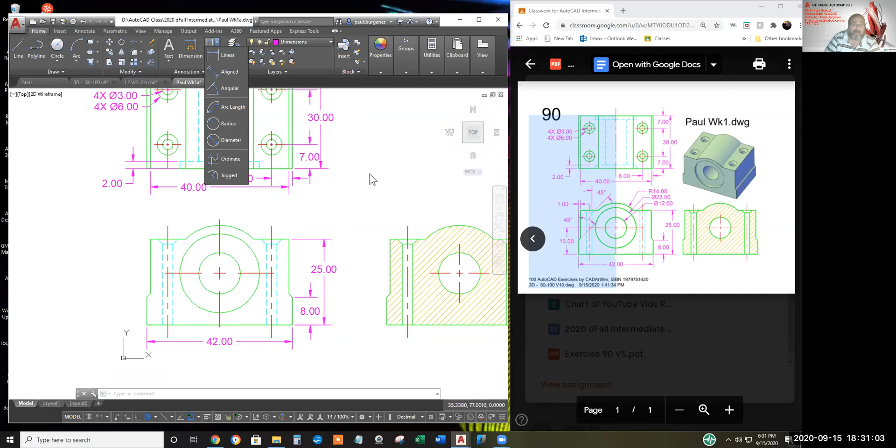Okay, we got 15 minutes. Before I forget, I still need some dimensioning done.

Before I forget, I want to show you, start a good precedent. If I were to collect these things, I'd want your name, preferably on a layer named text, but that wasn't on the list of layers to create. Maybe I'll do that for the next time.

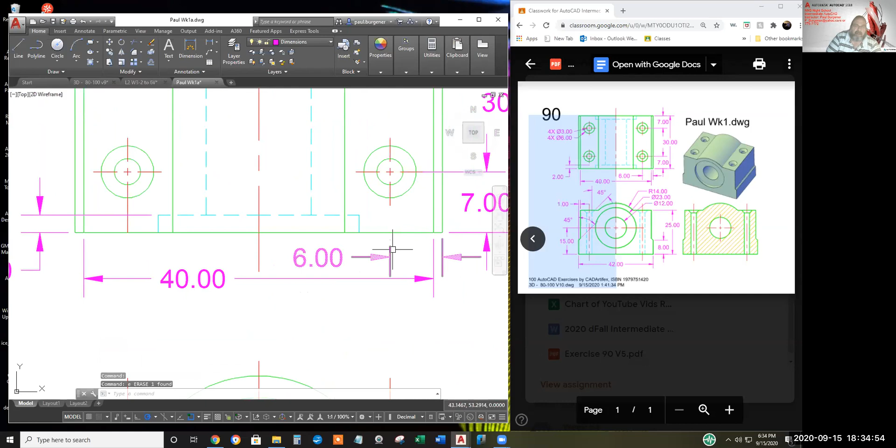There's some discussion on how, if a gap should be between an extension line and a center line. And I believe there should not be a gap. So the workaround is to grip edit it slightly inward from the end of the line. Move this down so there's a little bit more of a gap right here.

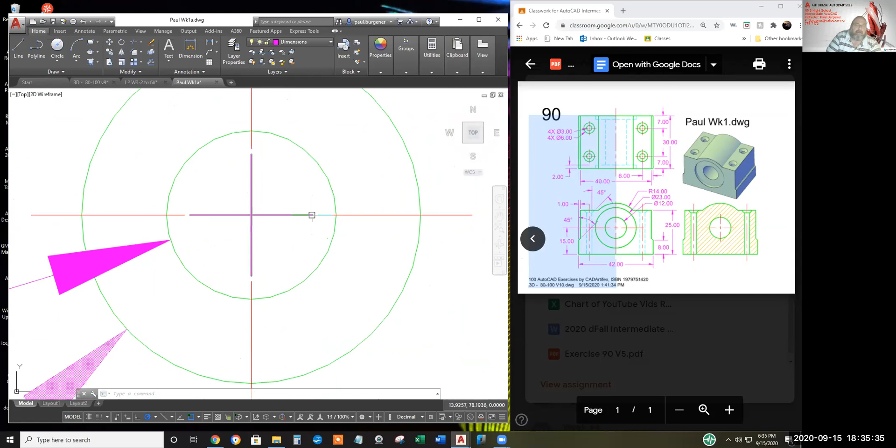How did I lose? Okay. I lost the plus sign here because the dim style puts a center mark. Magenta is so close to red, it's going to print out without a plus sign there. So note to self, fix the dim style to suppress the center mark.

Where's that? Yeah, symbols and arrows, none. I want none of the diameter or radii dimension. Put a little plus sign in the middle.

I'll move the full section view a hair to the left, since it'll minimize consumption of paper. Got a couple angle dimensions I need yet.

Rats. All right, I'll pick different. There we go. Try to match the handout and then grip edit to match the handout even better.

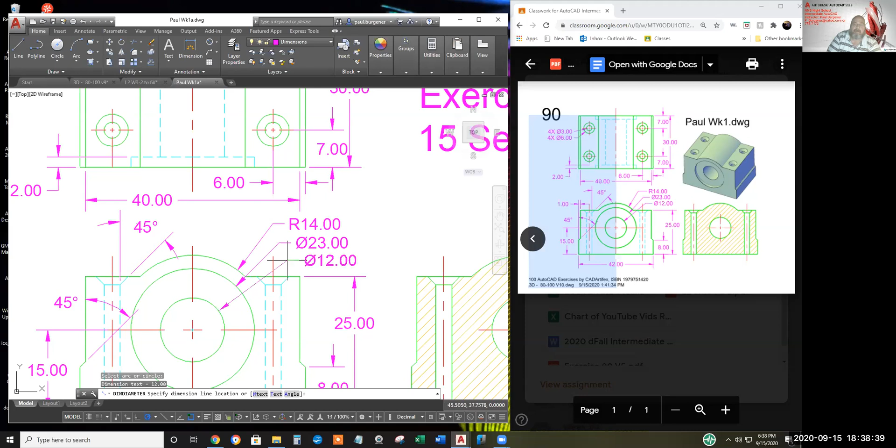Missing that little 1 unit redundant dimension there, till I decide whether to add it to the errata sheet. Pick the endpoints in the wrong order, not a problem, I'll just fix it with grip editing.

What am I missing? I think I'm going to change the. All right, how do I change the text type?

Don't bother following me, maybe I'm just getting cocky and showing off, but I'm going to change it to middle center and alter the line spacing factor to 0.85, enter.

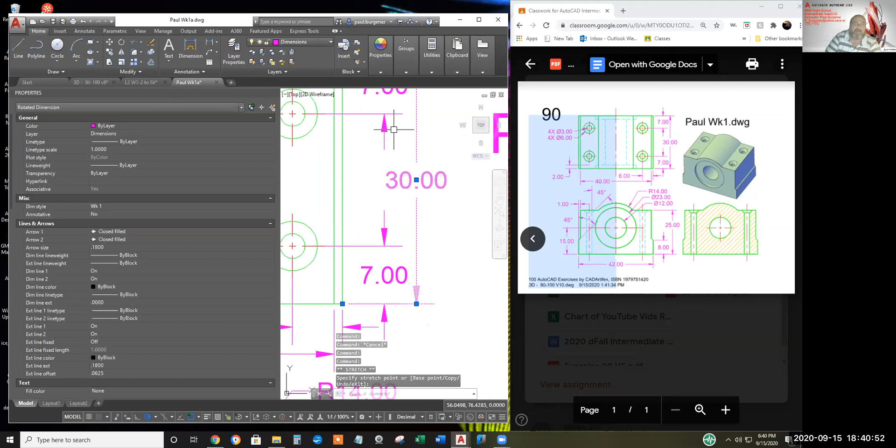Okay, that hangs a hair to the right, requiring a hair more paper, so I will move it over so it does not. A little bit tight there, so I'll grip edit and slide this 30 dimension a hair over, making sure that this white space is still longer than this white space.

Top and front view are a hair close, so move everything on the top of the drawing a hair up.

I have a quick question for you, Paul. Yes, Damien. What is the text style of the dimensions? Standard. I kind of gave you a break on that, but the handout's only requirement was, how to put this, there was no mention of a text style, so the dim style is identical to the standard dim style, which uses the standard text style.

I don't think we're going to get into text styles again. I'd like you to use text, but I don't believe I've ever had a handout requirement for an alternate text style other than standard. I'll have to check, I don't think it's in the birdhouse requirement.

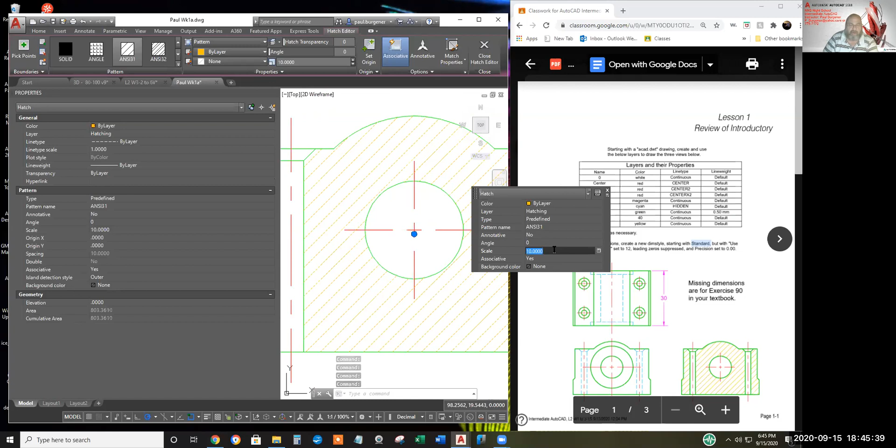I just remembered, I think I will change the scaling of this cross-hatching from 10 to say 12, since now that I compare it with the handout, I think the spacing is a bit small.